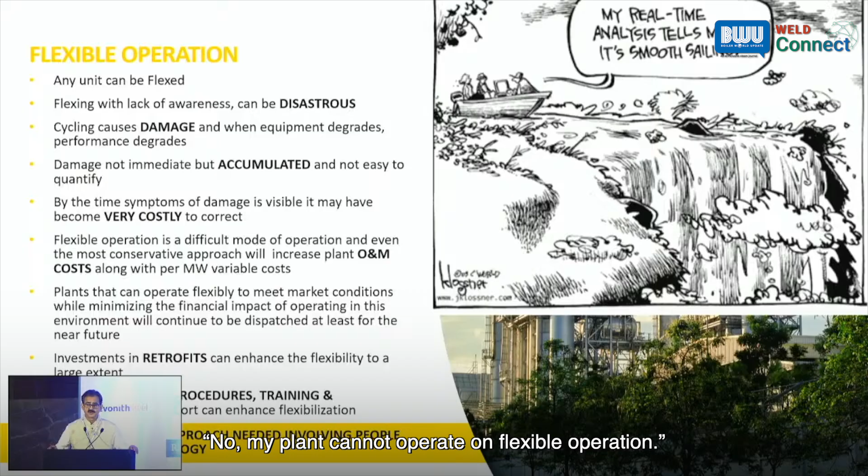See, one thing is, what is the effect of flexible operation? There is a concept of damage, accumulation of damage. In fact, any unit can be flexibilized. People say that no, my plant cannot operate on flexible operation. It's not true. It's just the interventions needed may be very different. There is no one plug and play solution. Every unit is unique and they need unique solutions. And cost can vary. Just to enable them to do a flexible operation, there can be different costs.

But you need to understand that every time you do a flexible operation, there are some damages. Even if you do it in the best way. And if you don't do it with the proper awareness, then it can even be disastrous. Safety is one aspect. Safety must be looked at before you start anything. For any operation you are doing, see what is the effect on safety. Then you start with economic cost and other things, and then the performance.

So, one example which I very often give to explain the concept of damages is a paper clip. You take it once, fold it, unfold it. You can do it 50 times. You won't see the damage. Maybe on the 60th time, you find some mark, and then one more time, and it's broken. Similar thing is a machine. Every time you are doing it, there is damage, and that damage gets accumulated. It's delta X, delta X1, X2, and like this, till there is a breaking point.

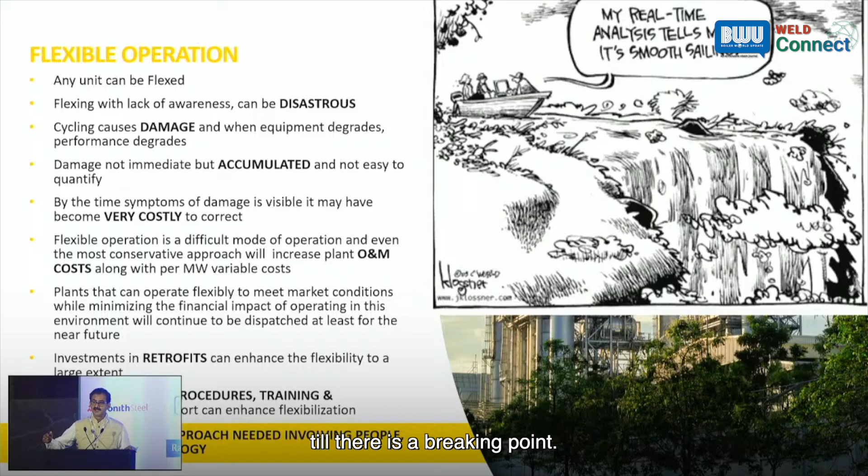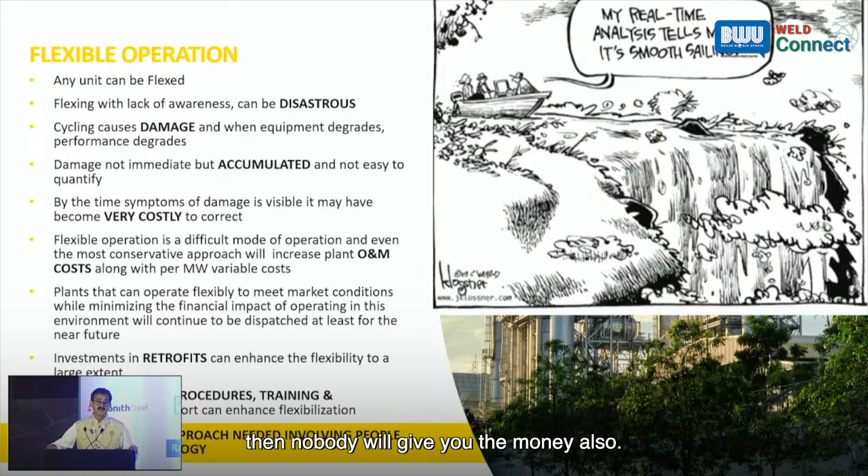So, the bad part is today operators are not aware of what damages they are doing to the machine. And how can they recover the cost? Especially the IPPs. After 7 years, they may need a capital replacement. This is how many plants in Europe, some 20 years back, went out of business. Because they did it and it was broken and they couldn't recover the money from the market. So if you are not recovering it for every such operation, at the end when there is a catastrophic failure, nobody will give you the money. So every time you are making a business loss, an economic loss, you need to understand those things.

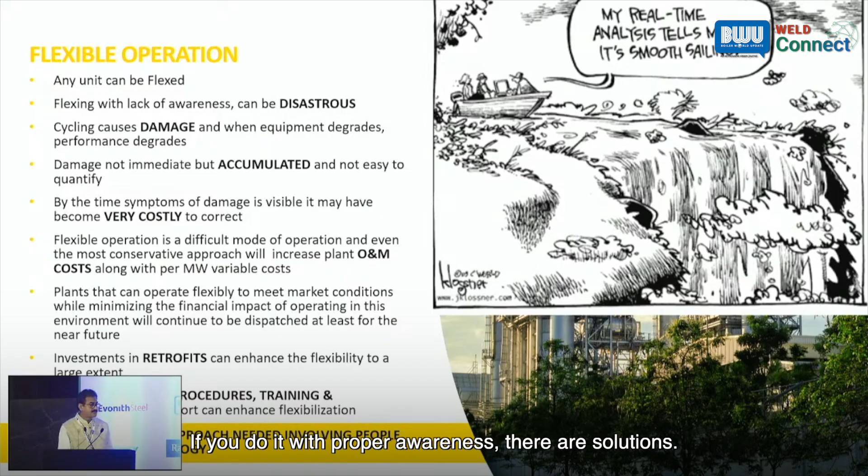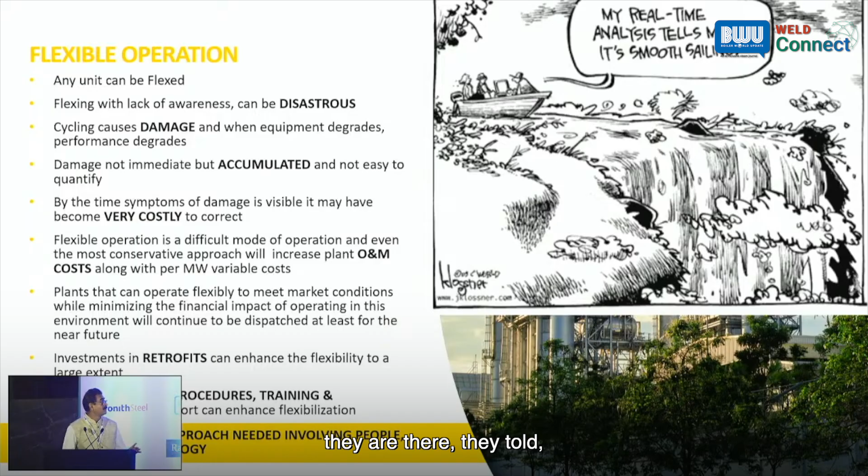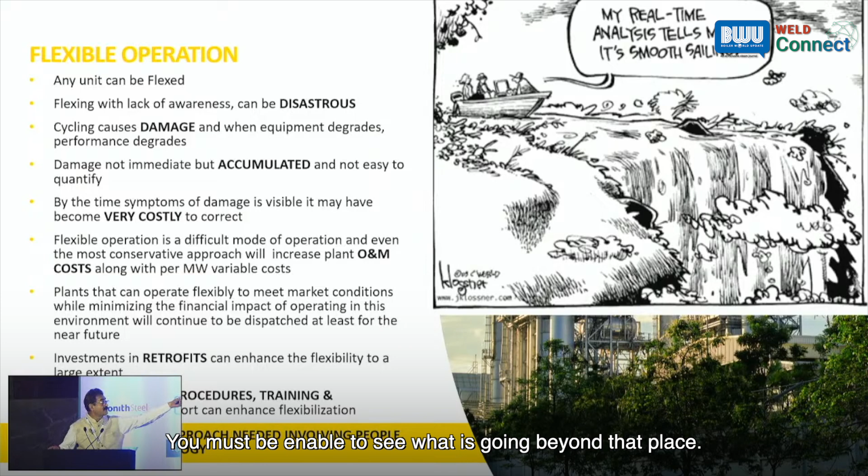And there are solutions today. If you do it with proper awareness, there are solutions. See, these people on the boat, they don't know what is going to come. See the picture carefully. They said, okay, my analysis tells me everything is okay. But even with the analysis, you need much more than that. You must be enabled to see what is going on beyond that place, which is not visible right at the moment. This should be your approach.

So what are the interventions? I can talk on this topic. Certain interventions, there's a lot of discussion in the plant and there's resistance also. This flexible operation, see, it's a reality. You want it or not, it's going to happen. It's not that I won't run it. The grid won't give you a schedule. You'll have to go. If your reliability is not good, then you'll go into flexible operation. Even if you're not aware of it, every time your equipment trips, there is a load throw off, that is flexible operation. So there's no one plug and play solution.

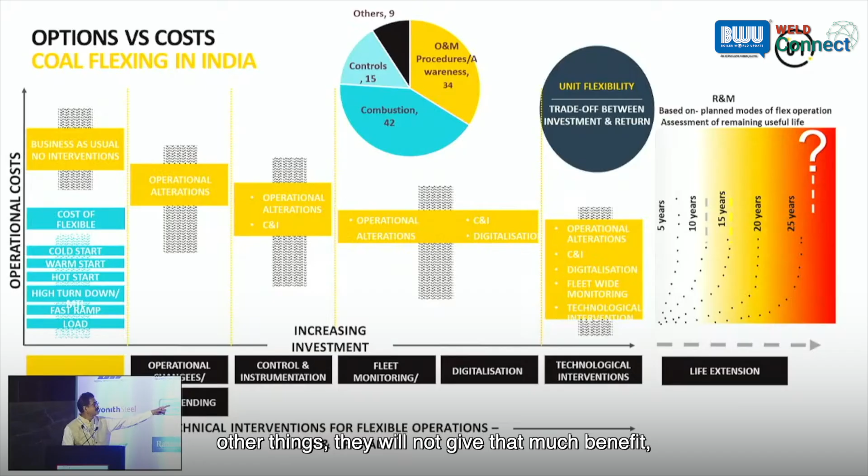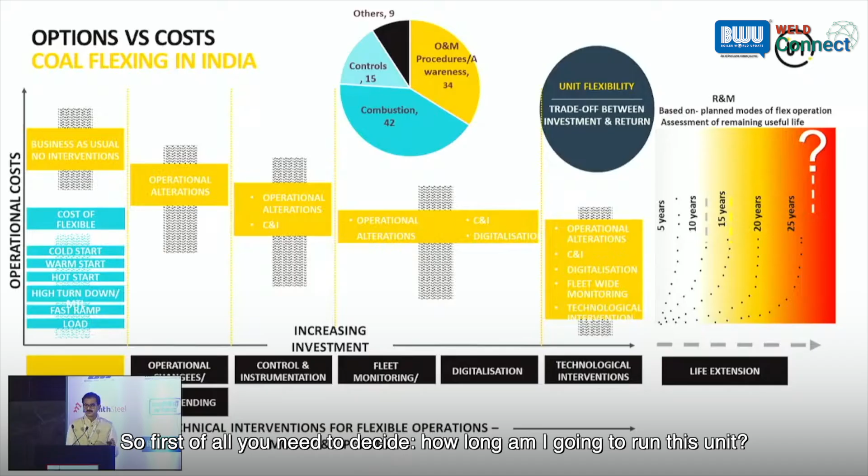And then people just jump into digitalization and other things. But you may not be required to do anything beyond these first two: changing the operations plus C&I, meaning controls. Just taking care of your controls. Other things won't give that much benefit. But the first two give you the maximum benefit. And then for certain old machines, you may have to go for R&M. An R&M strategy is also needed. So first of all, you need to decide how long I'm going to run this unit. What should be the R&M strategy?

So I'm telling you about the damages and the cost. We had worked on this and shared it with CERC long back for a compensation mechanism. So for every operation, if you see, LL1 and LL2 are load following. Unless there is significant load following, there won't be damages. So we take LL3 as significant load following. So there is a cost for that. And we had estimated something like 1.95 to 2.7 lakhs for one load following in a 500 megawatt unit.

And recently we have also done studies for supercritical units. For a hot start, the cost is around 20 to 30 lakhs for 200, and for 500 it's 78 lakhs to say 1 crore for every hot start. A warm start is a bit more, and a cold start is way higher, 2.62 crore for every cold start. And there's one misconception that flexible operation means minimum load operation, meaning we are not capable of going to say 50% or 40%. You need to understand that if you develop that capability, you'll save on all these costs.

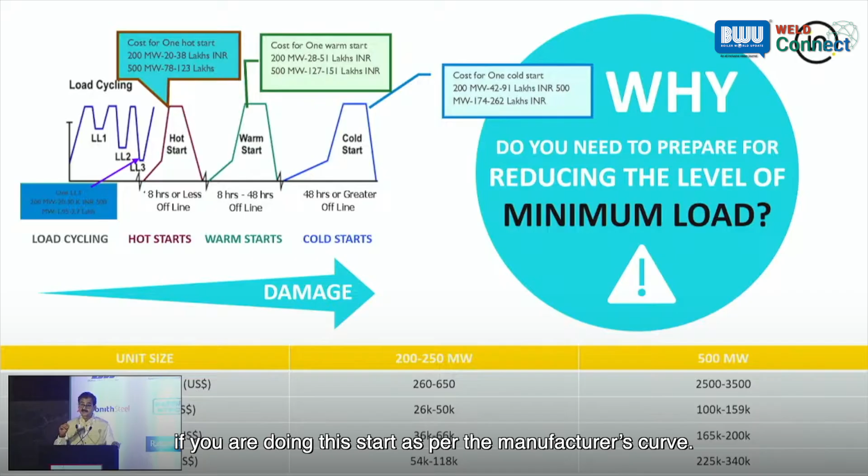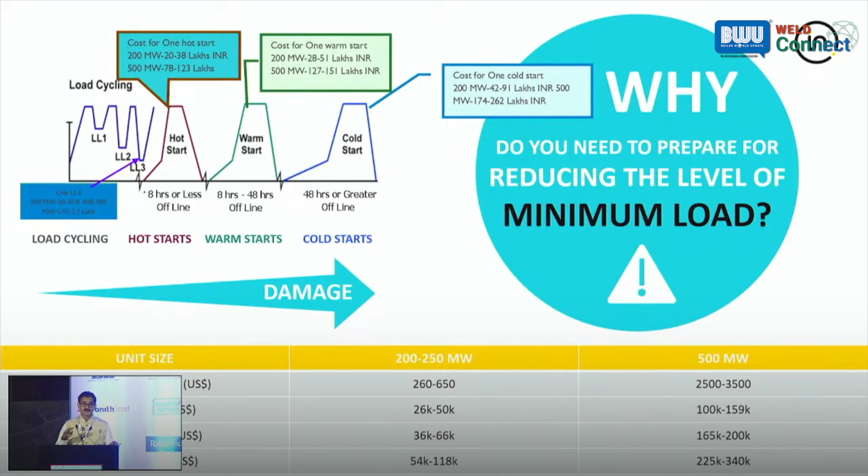See, every machine is designed for a particular number of starts. And every time you do a cold start for a machine, typically you lose 60 hours of your life, if you are doing the start as per the manufacturer's curve, but it doesn't happen in real life. We were studying one of the plants and comparing two operators. One operator had done 16 times more damage than the other. It can vary from operator to operator. So this is the importance of skilling. And at minimum load, if you are able to operate and maintain your parameters, you won't even get the cost of this load following.